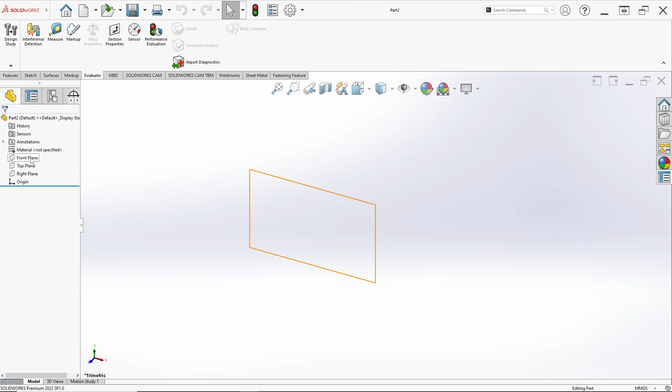In this time we will learn how to design a simple part. The part is a clamp bracket. Just start it, open SolidWorks. We start from the front plane, so right click on the front plane and click sketch. We start from here, the front plane.

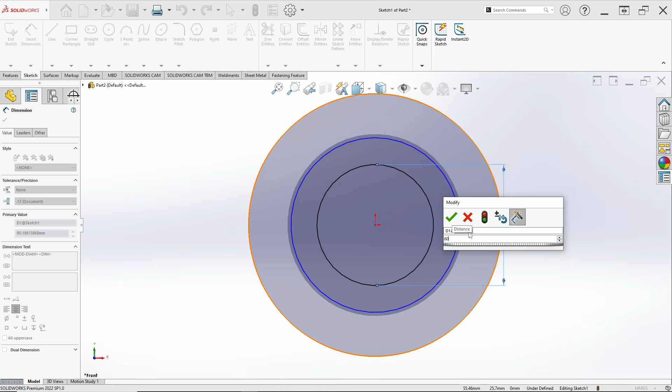Make two circles, so select circle, draw like this, and set the dimension. In here use millimeter unit, so the first circle has diameter 60 millimeter and the second circle has diameter 70 millimeter, like this.

Then go to feature and extrude boss, for direction we change to mid plane, and for the thickness in here is 44 millimeter. Just input 44 millimeter, click OK.

Like this, we want to make a sketch in here like this. So in here have a distance of 6 millimeter.

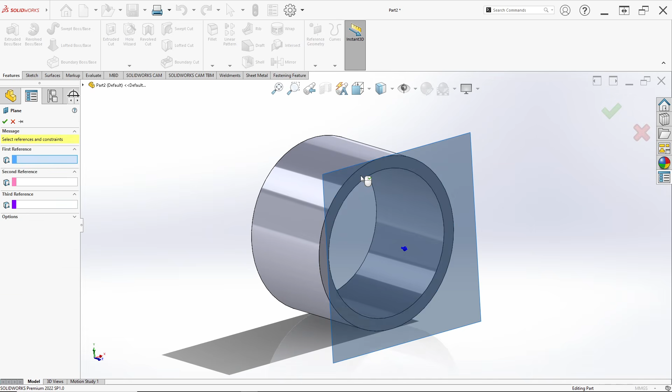Go to feature and click reference geometry, click plane. We want to make a new plane. For the first plane, select this face and reverse direction with checklist in flip offset in here. But in here the distance is 6 millimeter. Change in here to 6 millimeter, just click OK. We just made a new plane.

The name is plane 1, so right click on the new plane and click sketch. Start from center line like this, draw to the top, ensure in here make vertical like this, then set the height of the center line.

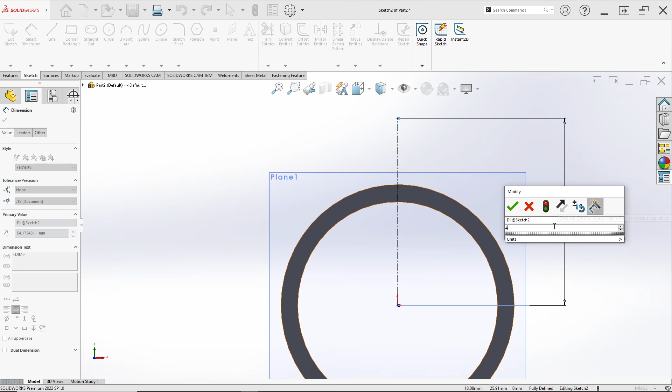This center of hole and this center of hole in the circle have a distance of 42 millimeter like this. So input in here 42 millimeter like this. Then draw the length.

This to this like this. Ensure this line makes vertical, this line makes horizontal. We can see in here the total, this face to this face, is 32 plus 3 plus 32, which is 67.

So click smart dimension, click this line and click this center line with shift on your keyboard. The total is 67 millimeter. The total in here to here is that amount because in the center there is a cut of 3 millimeter like this.

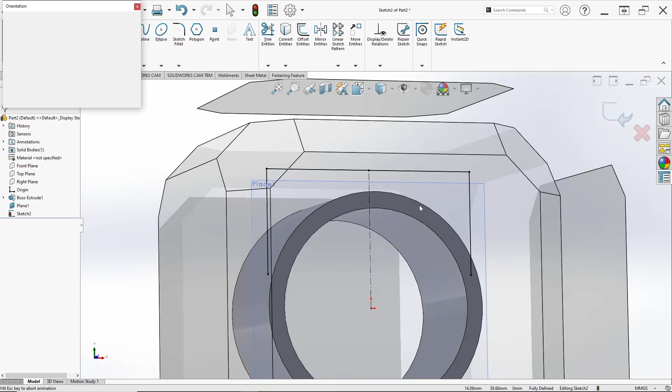After that we just mirror entities. Entities mirror, click this line and for mirror about, choose this center line. Just click OK, like this. Then convert entities for this edge or this circle and click OK. Trim entities, this line and this line below, just click OK and click extrude boss.

For direction we change to blind and click reverse direction in here. The total thickness in here is 28. So input in here 28 millimeter. Just click OK and done.

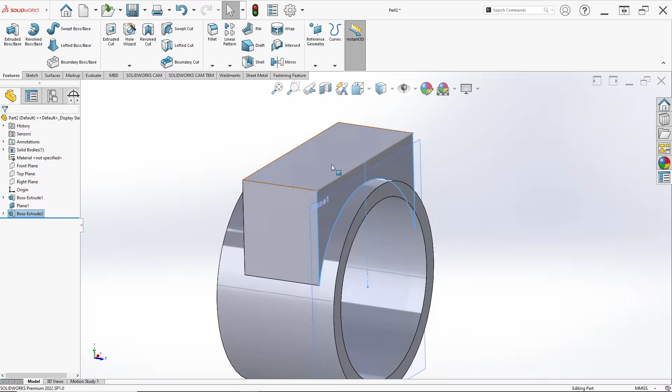Like this, we can hide this plane. Click this face and right click and click sketch. And draw a 3-point arc, this point to this point. Then okay. Then set the dimension for radius in here, which is 14, like this.

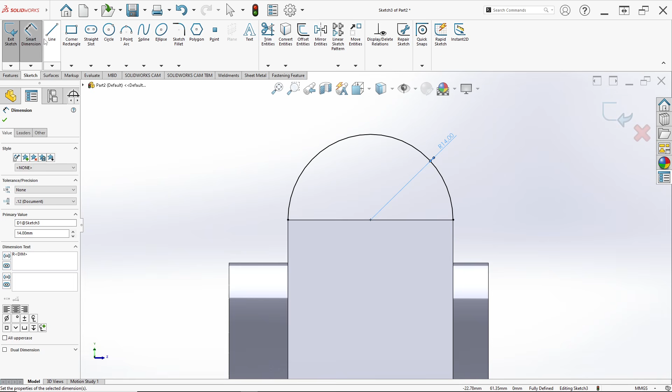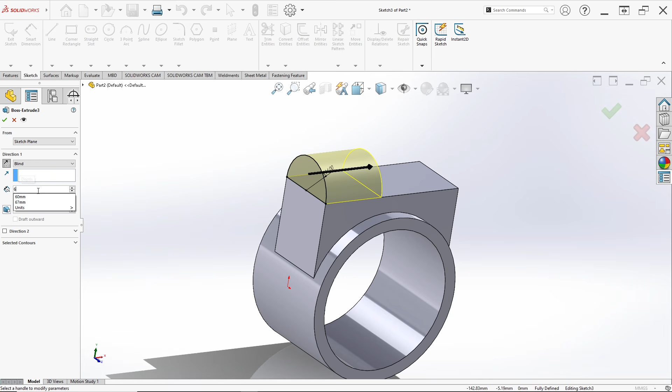Make a line, draw this point to this point, and go to feature and click extrude boss. Reverse direction, for direction we change to through all, just click OK. Sorry, for direction we can edit the feature, change it to blind, the total is 67 like this. Just click OK and done like this.

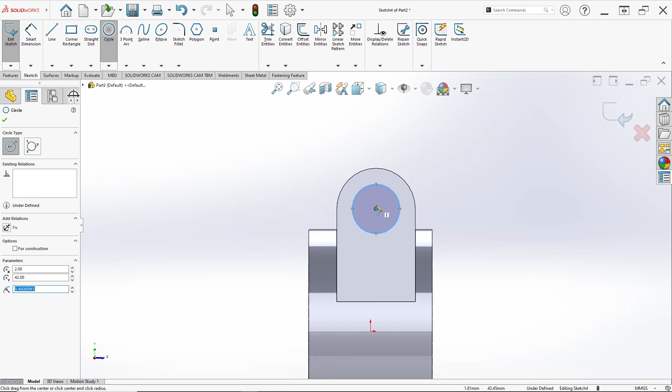Click again this face, right click and click sketch. To make a hole, select this circle, then ensure, choose from this point or the center in here. Then set the dimension, for the hole diameter is 12 millimeter. Just click OK and go to feature, click extrude cut. Direction is through all, just click OK and done.

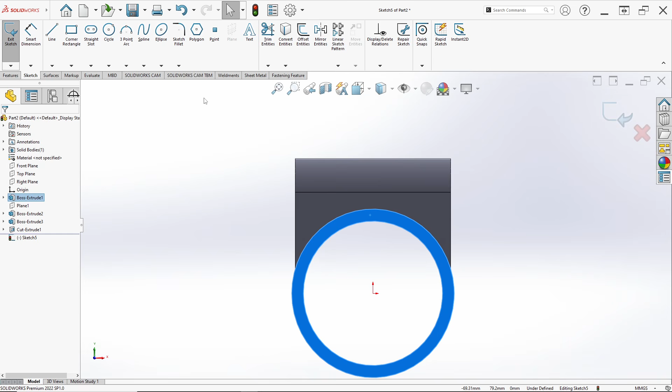Don't forget, in here have a cut. The distance is 3 millimeter in here, the width is 3 millimeter. So click this face, right click and click sketch. Draw corner rectangle like this and ensure this center of the rectangle and this point click make vertical.

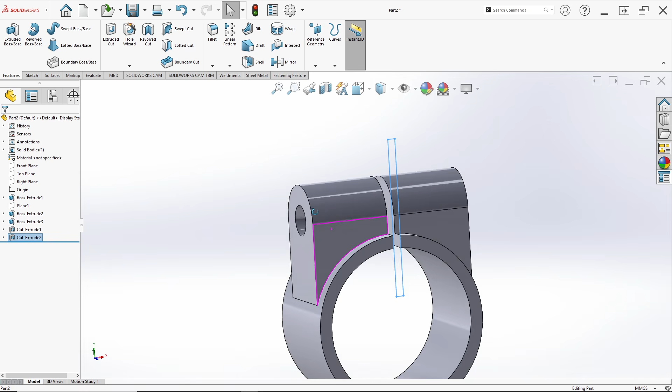After that, set the dimension in here to 3 millimeter. Go to feature and click extrude cut. For direction is through all and just click OK and done. Like this, so simple.

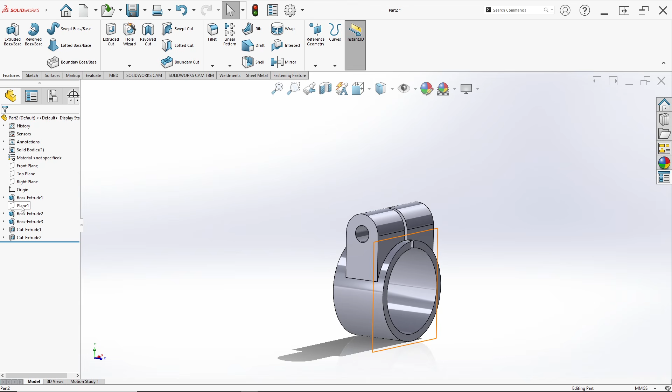After that, we can see again in here we want to make a part like this. So the distance is the same, 6 millimeter in here. So we can click again the plane one and click sketch. Draw center line again from this to this in here.

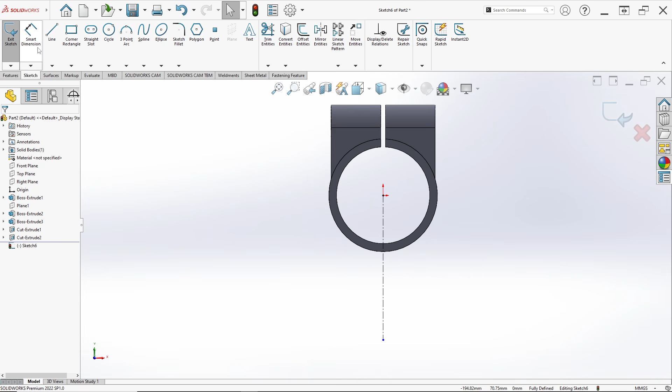We can see in here the total, this hole, the center to the bottom edge is 105, but we just make the line until this face. So 105 minus 10 is 95. Input 95 millimeter. So draw line like this.

Sorry, we can change again. Draw line to this. Then set the dimension in here. The total width in here is 60 millimeter. So click this line and click shift on your keyboard and this line, input 60 millimeter. So simple.

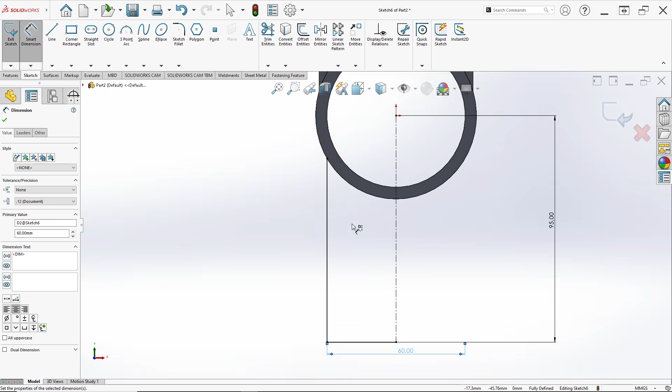Ensure this line, click make vertical. And mirror entities this line, mirror about click this center line. Just click OK. And convert entities for this edge.

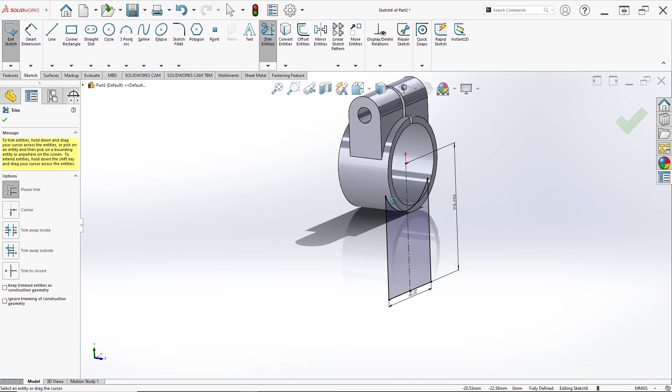After that, go to feature and click extrude boss. For direction, we can change in blind like this, reverse direction like this. The thickness is 6 millimeter. Just click OK.

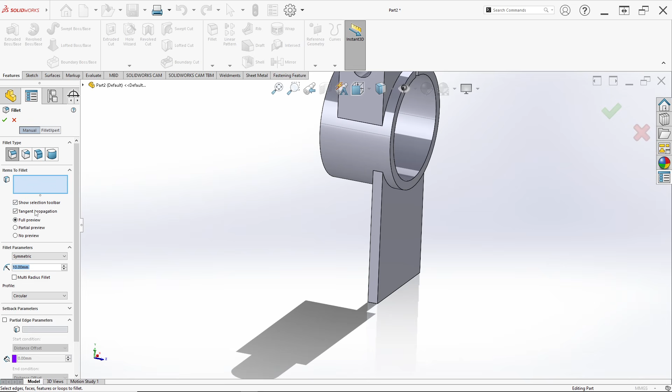After that, in here have a radius 5 millimeter. Click a fillet and input in 5 millimeter for fillet parameter. Click this edge and this edge like this. Click OK.

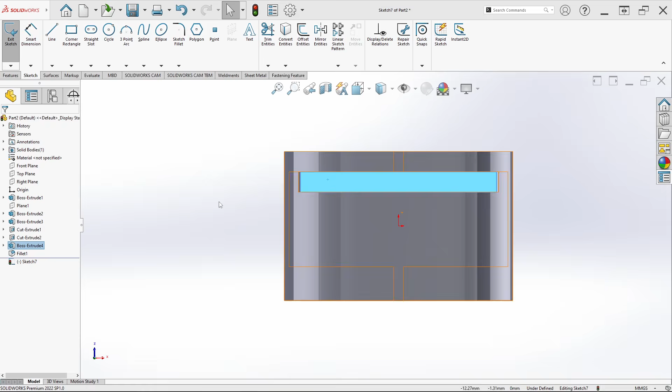And click again this face in bottom. Click this face, right click and click sketch. You want to make in the top and bottom sketch like this. Click corner rectangle, draw like this.

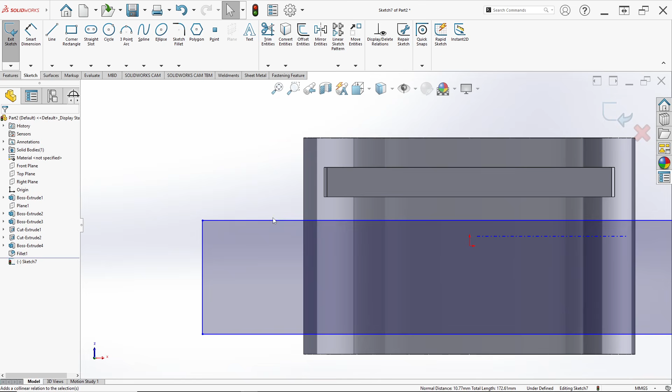Ensure the center of corner rectangle, click and the center this part. Click make vertical. Then click this line and click this edge, click make collinear. Click this and let's click make collinear like this. Then set the dimension for length in 120 millimeter and for width is 42 millimeter.

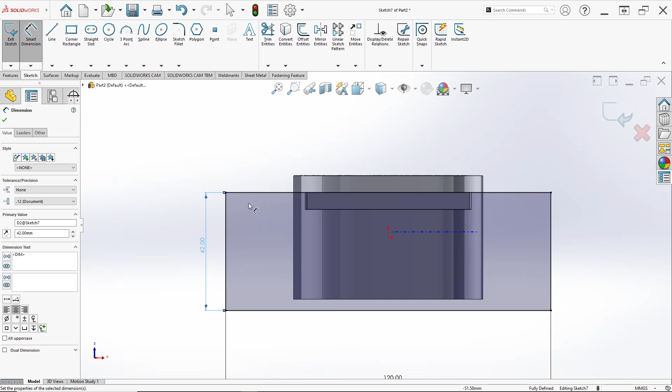Just click OK. And don't forget in here have a fillet radius name, radius 6 millimeter. Just click sketch fillet. If the radius is 6 millimeter, click this point, just click yes. This point, click yes, and this point.

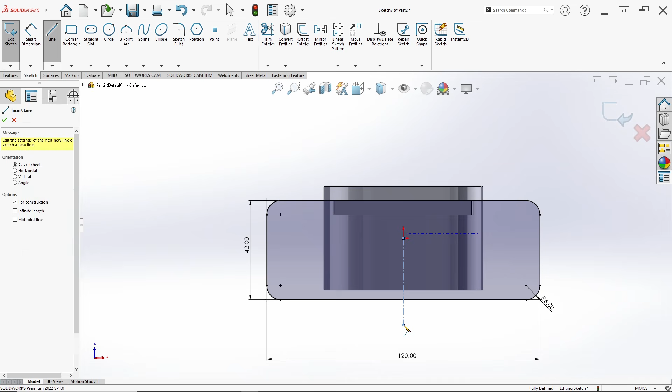Like this. Then for the stand in here is 21 millimeter. So this line to this line is 21 millimeter, like this. Because we in here is this face, so the center this line is 21 millimeter, and the distance for each hole, in between two hole, in 90 millimeter.

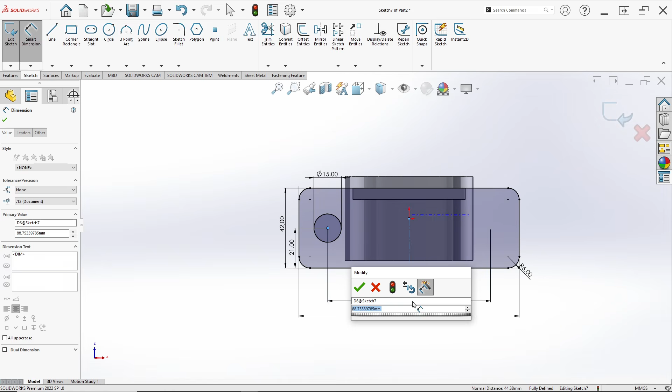So click this center and click shift on your keyboard, click this center line and input in 90 millimeter, like this. So simple. After that we just mirror entities this circle, mirror about click this center line, and just click OK. Go to feature and click extrude boss. For thickness is 10 millimeter in here.

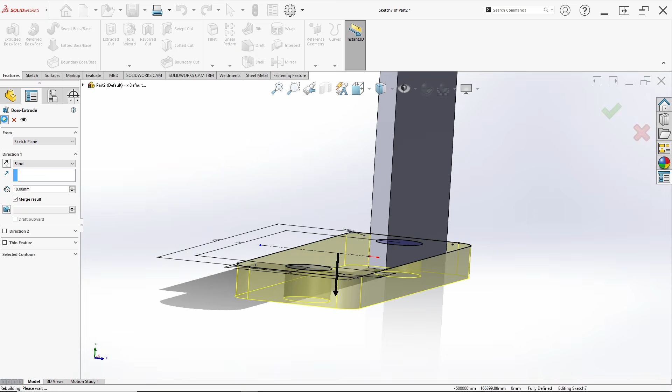Just click OK. Don't forget in here have fillet radius is 16. Click fillet and fillet parameter change in 16 millimeter for radius. Click this edge and click this edge. Just click OK.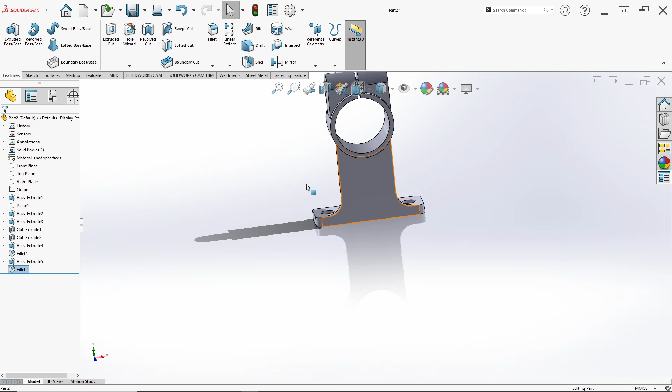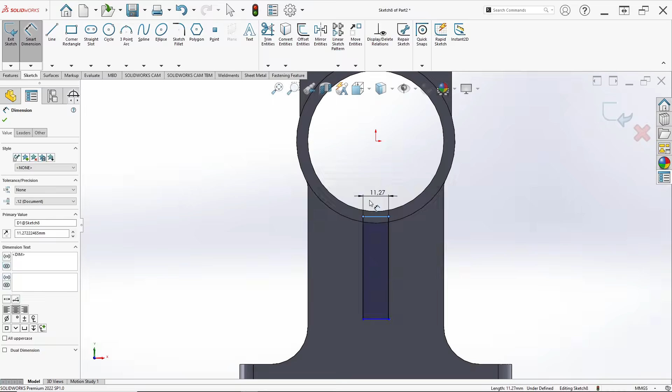We can see in here have like a rib. So click this face, right click and click sketch. Draw corner rectangle and ensure the center to this point, center point, and click make vertical. The width is 6 millimeter and the distance, this line and this line have distance 20 millimeter.

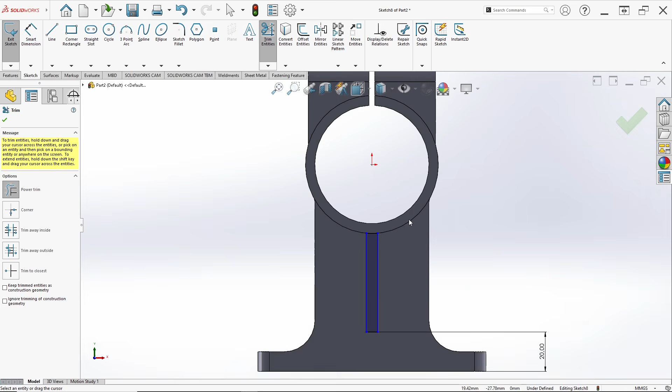Then convert entities this edge and just click OK. Trim entities this and this. Just click OK and exit sketch. After that, click top plane, right click and click sketch.

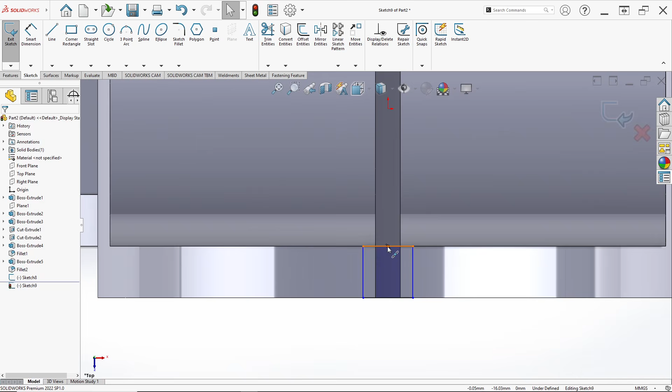Draw corner rectangle again from this point to this. Ensure this center and this, click make vertical and the width is 6 millimeter. Click OK. Then go to feature and click curve and click split line.

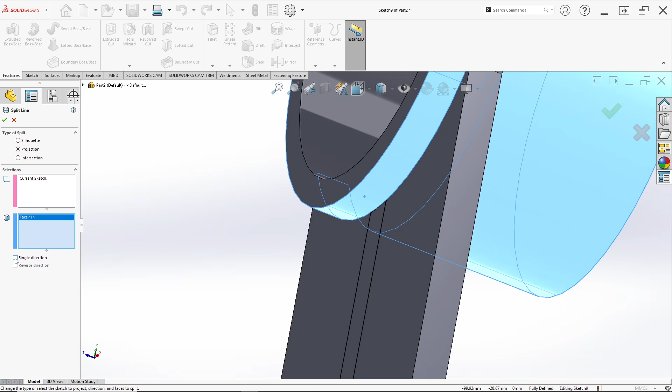Selection is current sketch and face. Just click this face or this cylinder. Direction is single direction to the bottom in here, ensure and just click OK. And then we just use like this and use lofted boss in here.

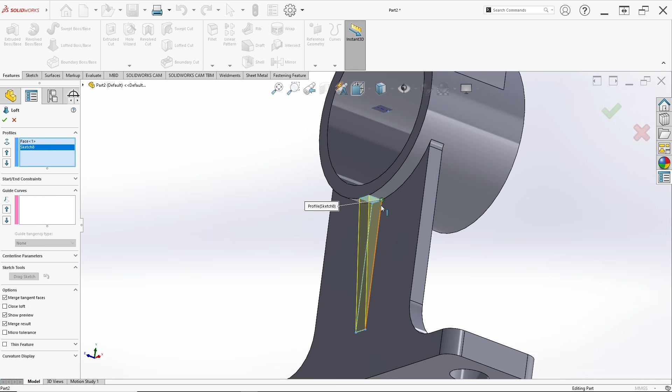Click profile, click this face and click this sketch, and done. We just to make rib like this, just click OK, and done, like this. So simple. And in here have like rib again in here.

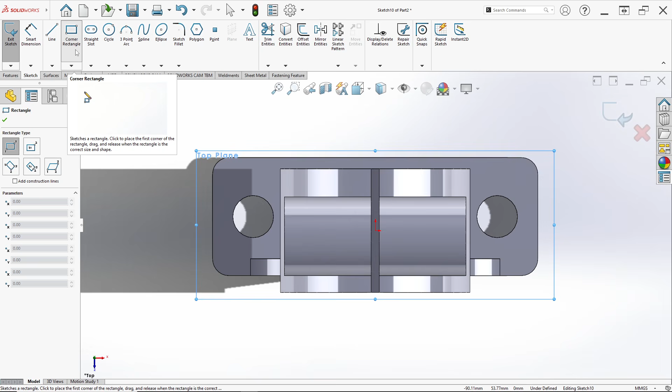So just to make again top plane, right click on top plane and click sketch. Draw in here, draw center, draw corner rectangle this to this, like this. Ensure this corner rectangle and this point, click make vertical.

Then click this line and this edge, click make collinear, and set the dimension for width in 6 millimeter, like this. So simple. After that, go to feature again and click curve again, click split line and for face.

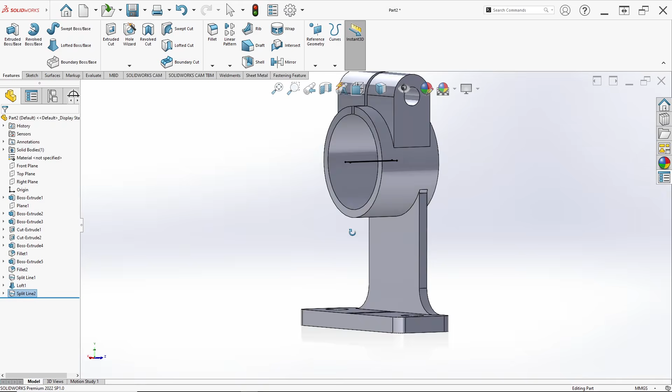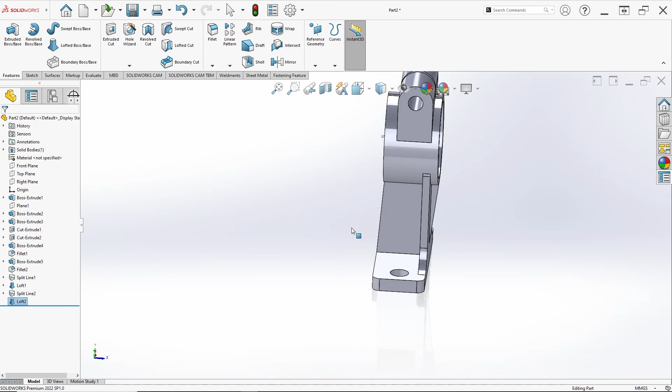Then click loft boss again. For profile, click this face and click this face, and just click OK. So simple to make clamp bracket like this drawing.

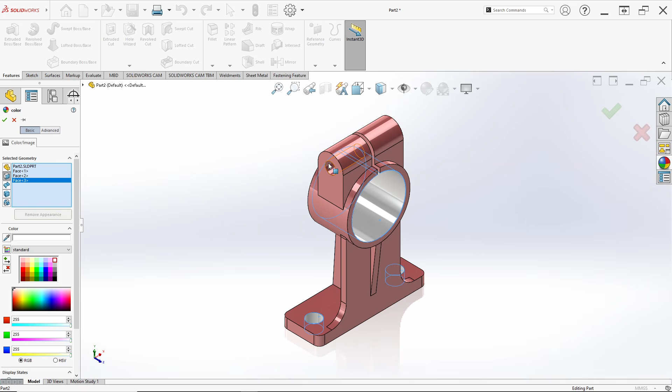We just to change the color of the part, change the color, maybe like this, red, and change the color again in white. For face, the hole, this hole, this hole, this hole, and this hole, this cut, and this cut.

Just click OK, and then it's so simple to practice, especially for beginner in SolidWorks.